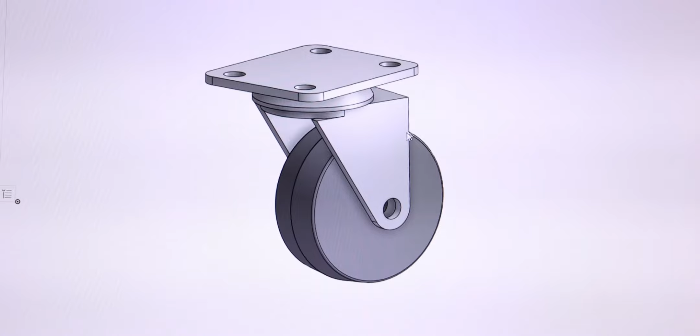I went through and CAD'd up the caster wheel here. It even spins and everything, and it's really cool.

Over here is currently what I have for the snowblower lawnmower chassis. I've got some 4-inch Vex Robotics traction wheels, our 2 caster wheels in the back, and the 775 motors going directly into the wheel.

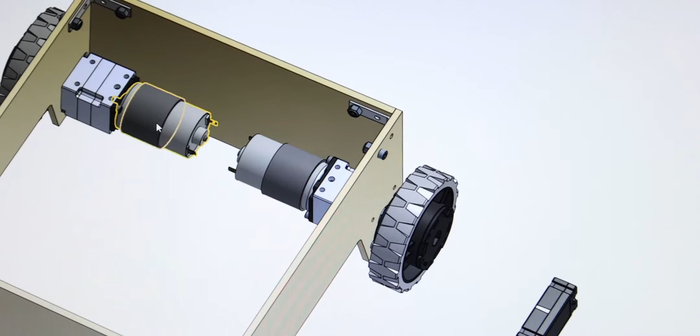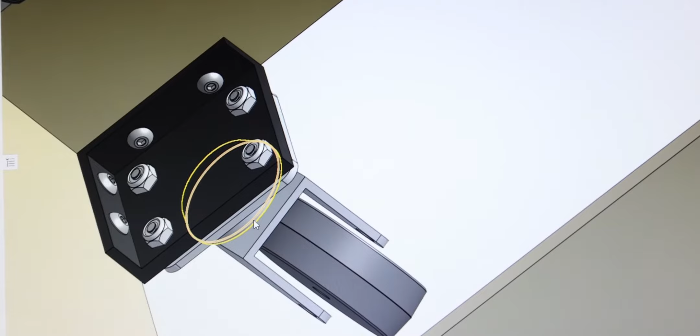I got a shaft collar in here somewhere. I had to make a custom 3D printed plate back here to hold the caster wheel. These are all Vex 8-32 bolts, 1/2 inch each, with nylon lock nuts, plus some corner brackets from the other lawnmower.

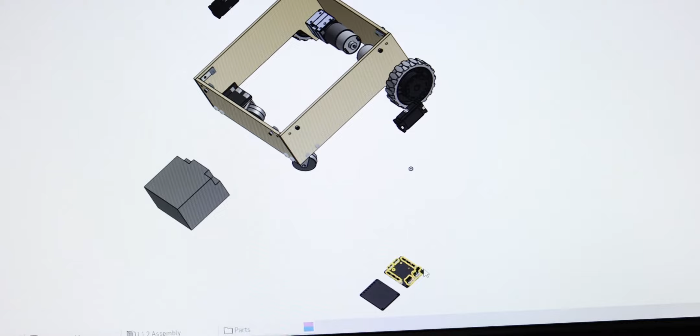I'm still looking to figure out a way to put the Victors in here, the battery, the CTRE power distribution panel, and the hero board. So that's our next step. I think that'll be the next time I check in, once I get all those pieces put somewhere in the chassis.

I think if I just use some wood and then make some 3D printed brackets or something like that to mount everything, it should be good.

I'm debating on whether or not to put Lexan across the top and bottom, because we need to stop the snow from getting in on top and bottom. We'll see about that. Other than that, I still need to order the parts for this, so I'm trying to finish up the CAD as soon as possible.

That way I can get to ordering parts and actually build it before all the snow goes away, because we haven't gotten much snow to begin with, and I really don't want to build all this and then not have any snow. So anyways, we'll check back in whenever I finish CADing up the robot.

Okay, I have some wood here, got it from Menards. It's 6 millimeters by 12 inches by about 24 inches. We're going to go ahead and cut this down to be the side walls and the base platform for the battery, for the chassis of the lawnmower and snowblower.

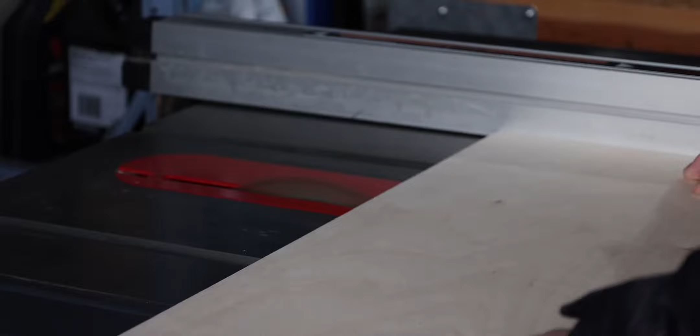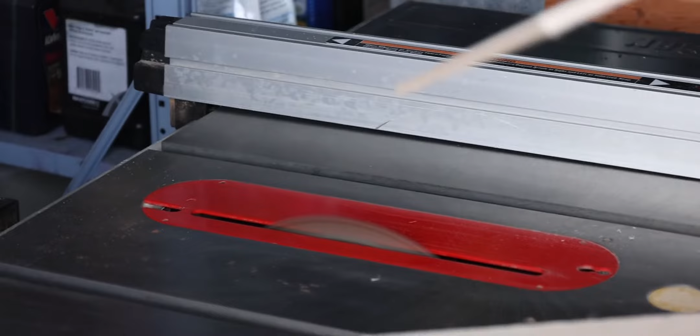Okay, well, we cut the wood. Here are all the pieces. We got a couple of 9 inches, a couple like 8 or whatever, and we're gonna go ahead and put these on the CNC mill and carve out these sides and all that stuff.

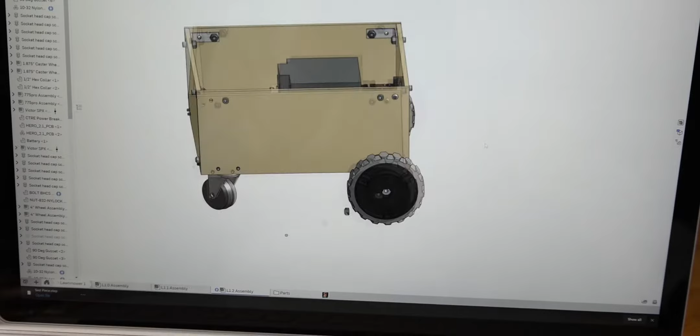I'm not exactly sure where I left off in the last update, but here we have the lawnmower chassis, snowblower chassis, pretty well finished, pretty well roughed out. We have a platform now for the battery. We got to move some other things and put some holes in here still, but all of the sides are looking pretty good. We got holes up here, and we got to put holes over here eventually, but this is about what it's going to look like.

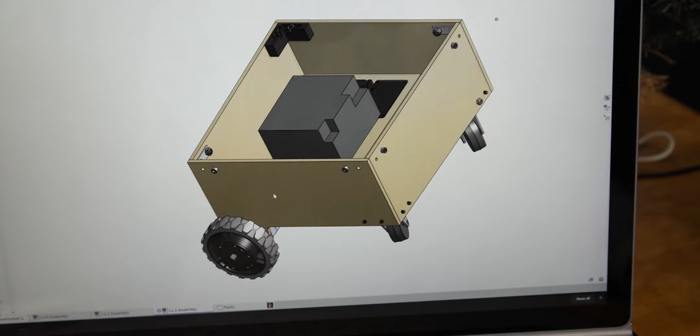Now I have a test piece because I'm going to start CNCing this, so I have a test piece here with a bunch of holes. I loaded it into Fusion 360 and did the manufacturing, all the stuff you need for that. So we're gonna go ahead and throw it on the CNC and try it out.

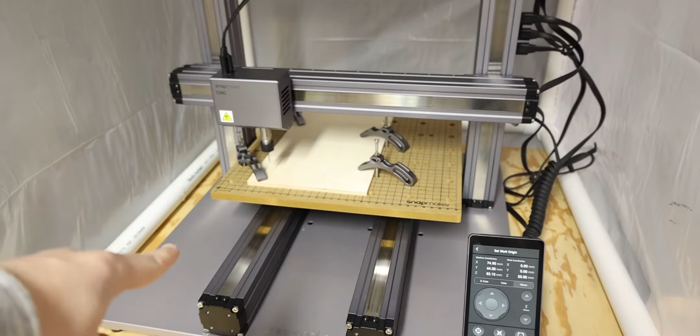Okay, our wood is in place, our work boundary is set, so now all we have to do is hit start and it should cut.

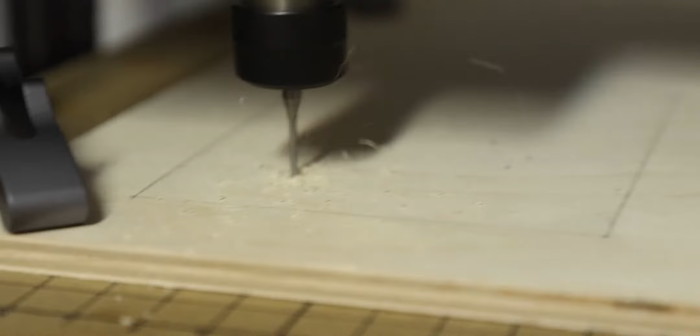Okay, the Snapmaker just finished. As you can see, it is all cut out and very beautiful. So we're gonna go ahead and take this over to the YouTube studio and see how it did.

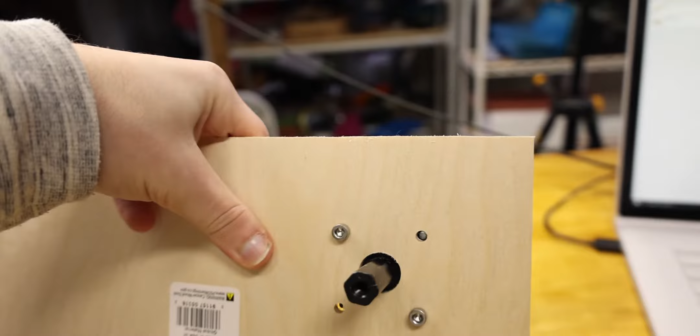Okay, so as you can see, the holes lined up perfectly. Everything fit. All the screws are literally exactly where they're supposed to be. One of the problems I had with the lawnmower is I was manually drilling all of the holes, so these wouldn't be exactly where they had to be.

In order to counteract that, I'd have to make the holes really big and put a washer and everything, and it was really, really annoying. But with the CNC, it drills it out perfectly and exactly where it needs to be. The 8-32s fit perfectly, along with the 6-32s, so everything is exactly where it should be.

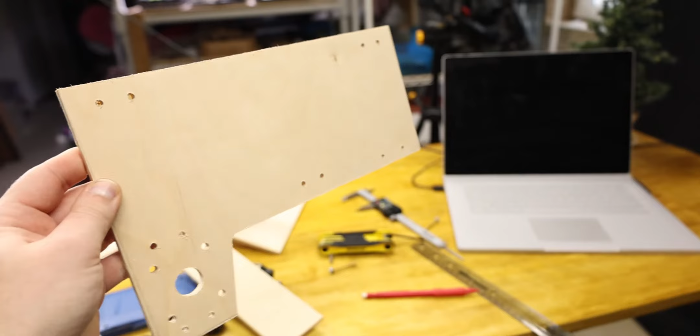So now we need to take our other parts, put them in Fusion, and then put them on the Snapmaker. Okay, here's the first official part for the L1.2. This is the side walls and everything. It worked great, the Snapmaker did awesome, did everything it was supposed to. And here's to four more.

Okay, well, we made good progress today on the wood for the lawnmower and everything. We got one of the side walls done and stuff like that. Then I was going to cut the second side wall, and I made the mistake of running the boundary while it was almost touching the wood. Because the wood warps, it accidentally hit a high spot and I broke my CNC bit, which really sucks.

So I'm putting a pause on the CNC thing until I can get some more bits, and I'm switching over to 3D printing now, so I can 3D print all my little corner gussets to attach the Lexan and the other pieces of wood and everything.

Yeah, kind of sucks that I broke my CNC bit, but what are you gonna do about it, I guess? Life moves forward. You learn a lesson, and I hope you guys can learn a lesson off my mistakes. We're gonna 3D print our gussets, and then hopefully Monday, or hopefully someday, we can get our CNC bits and finish it, whenever there's still snow here that we can still plow off our driveway. So for now, I guess I'll catch you guys up whenever the 3D printing finishes.